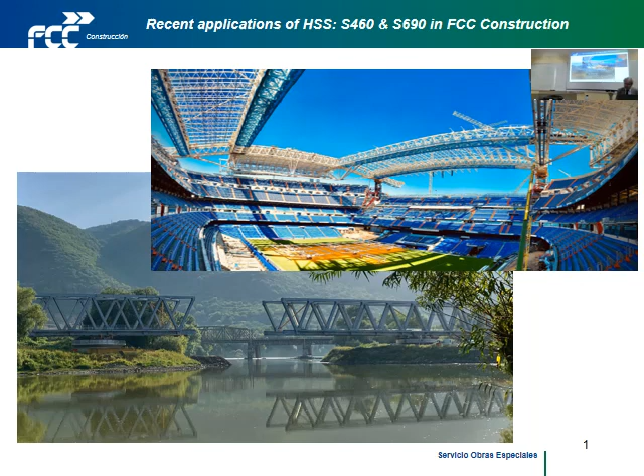Okay. Well, this, as he has mentioned, we're not going to talk about this today, because there's some 420 in Barajas, but not too much. Okay. Systems, floating, lifting. Okay, but that's not what we're going to talk about today. It is about the high-strength steel.

Well, as you can imagine, the word itself has changed over a long time. Now, more or less, we could agree to call high-strength steel something that's bigger than 355. But we also need to be able to... We'll talk mainly about 460, 690, and I'll try to mention something, but that doesn't mean we have used it. We are trying to use it, but not as something that's weldable, 960, okay?

But I think, from our point of view, after designing, we have to do the construction of the system. It's very important to actually have confidence that things are going to work. So we cannot get into some material in which we have any doubt about how it will be working. So besides the high yield of the material, we have to have a better toughness, so we can avoid brittle failure, and we have to have an improved weldability to avoid cold cracking.

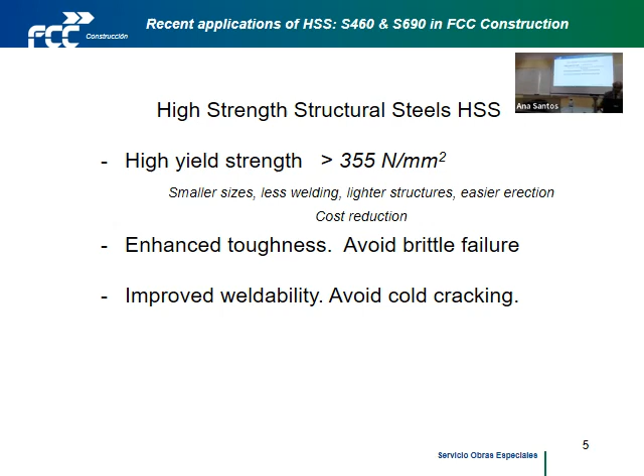That's why I'm going to talk at the end about 960. But never, at least from our point of view, as something weldable, at least up to the moment, weldable with the normal things. Okay. I wanted to tell you, of course, that we can remember that up to more or less, I don't know, I'm not very good with dates.

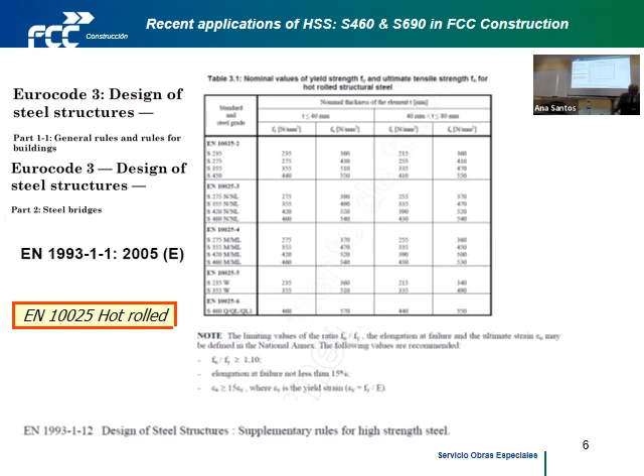More or less in 2005, in the Eurocode, we only got up to 460. And there were some supplementary rules that talk about high-strength steel. Later on, in part 1-12, we got up to 690, well it says 700, but 690. But there was a clear difference in how these steels are produced, which we'll talk about later, and so how we are going to be able to weld and to work with them.

And of course, there was a problem because up to 460, more or less, the old rules of Eurocode were good. Because there was a clear difference between the yield strength and the ultimate strength, so you could use plastic calculations. And now, since you get 690, the Eurocode has to start saying, okay, if you're going to do plastic calculation of the section, you can use up to 690. If you're going to do plastic calculation of the structure itself, then you are only able to use up to 460. And that's, let's go on.

And this is how it would be more or less in 2018. In 2018, already in the normal part, in part 1 of Eurocode, S690 has been included. Instead of being in a special part, it has been included in the normal part. And at some point they said that 960 would be included in part 12. But Kuhlmann, the person most responsible for Eurocode, has said that 960 can wait a little bit to be included in Eurocode.

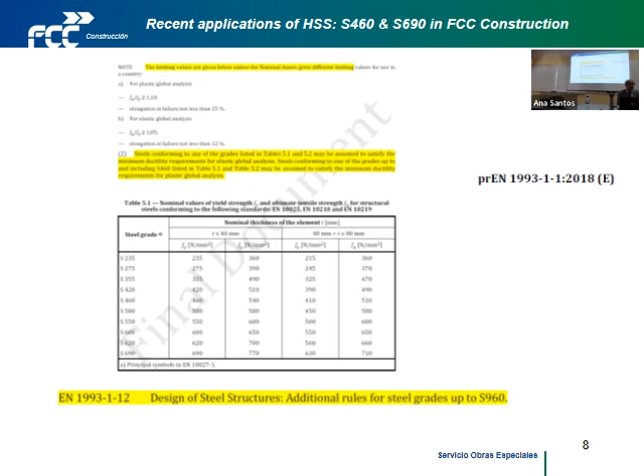We have used up to now 460, 420 at some moment, but I think 420 is dead because it's very near 355. 460, 690: we have used it a lot, and we'll see in the roof of the Bernabeu we have used more than 3,000 tons, but with a lot of care, of course. And for 960, we have proposed to use it, but without welding. We'll go on to this afterwards.

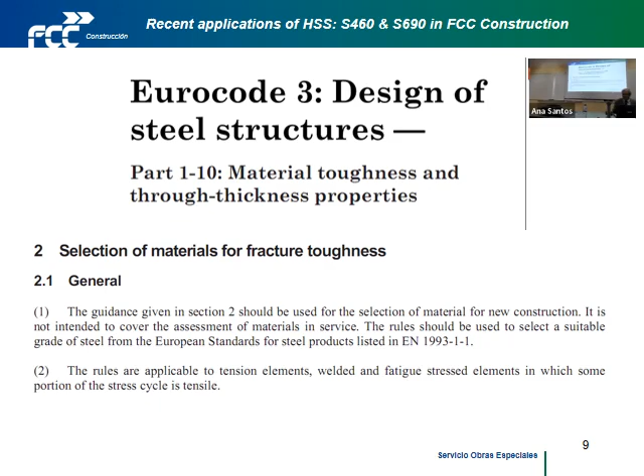Okay, we are not going to talk about fracture toughness. It's very important because in the selection of the material, we could say that the yield strength is only the name, but we have to have the surnames: the quality, at which temperature. But we cannot talk about everything because we don't have time. Of course, we have tables with which we can do this selection, or we can go back to fracture mechanics and look at the details to establish what quality, what subgrade of the material we really need.

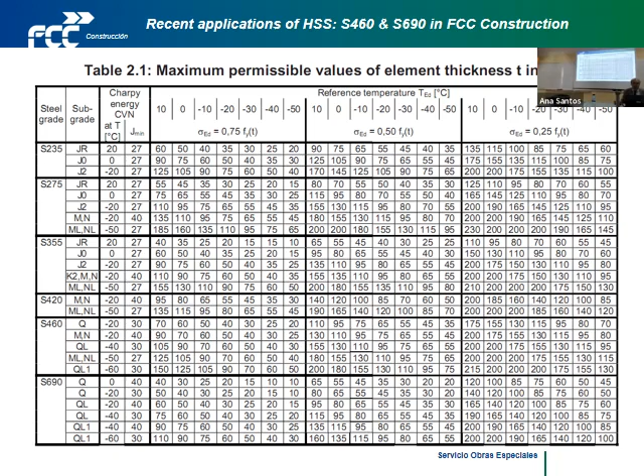All these materials have also changed over time, at least from my point of view. When we were younger, the different qualities of steel were in different standards. These are old standards. And now, to make people understand that all the steels are taken from the same place, the same as in calculations, they have placed all the steels in the famous standard EN 10025. But of course there are very big differences, because the first ones are the ones we have used for a long time. They are non-alloy steels, fine grain. These are the normal ones.

The thermomechanical ones are in part 4. We will see that the 460, we could say, is the thermomechanical one. If we have to be simple, we would say that up to 355, we would be in the first two standards. In part 4, we have the thermomechanical one, the 460. We'll go back to this, but in the thermomechanical steel, we are not gaining the properties simply by alloying, we gain them by a controlled fabrication process with rolling, deformation and temperature, the two things.

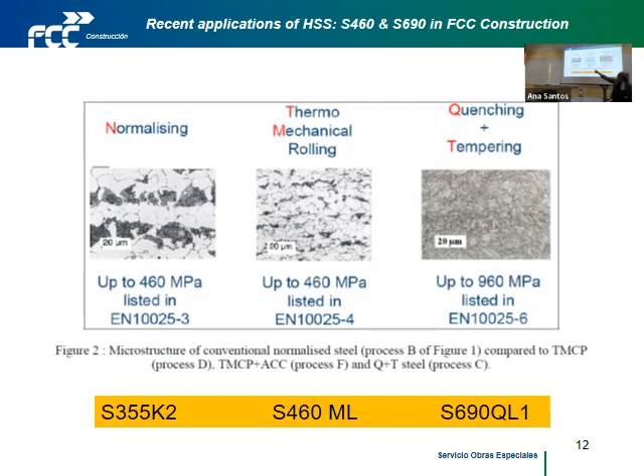In number 3 there are already some 460, but most of the 460 we can buy are already in number 4, in the standard number. Thermomechanical steels are not obtained simply by alloying.

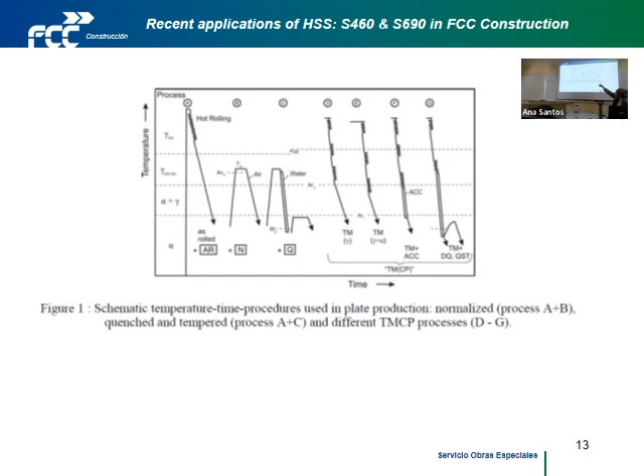As rolled, normalized, you put the temperature up, you let it slow down quickly, or a thermomechanical process, or the quenching, as I mentioned.

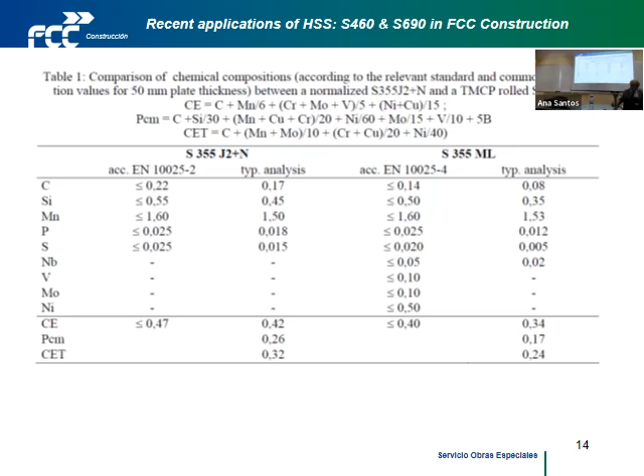Of course, the composition. Why are thermomechanical steels so pushed by people from the companies, from the providers, trying to sell them? Because it's easier to weld, since the properties give us a lower carbon equivalent, so it's easier to weld. We have better properties, of course.

Let's go now and try to mix all this together and talk about weldability. In weldability, at the end what we want is to weld the steels avoiding cracking, to weld the steels not with a special process that can only be done in a laboratory, but with a process that can be done in workshops. They have to be more specialized, but normal workshops, I mean, something we can do every day.

We are going to talk a lot about the heat affected zone. We are going to talk about that quite a lot because it's where we will find a lot of difference between the thermomechanical steels and the quenched and tempered steels, between 460 and 690.

One thing is that in the normal steels, we have used all from before up to now, up to only 355. What we were mainly concerned with was to avoid having, in this heat affected zone, too big an increase of hardness. The hardness of the heat affected zone is a measure of the type of structure we have in there.

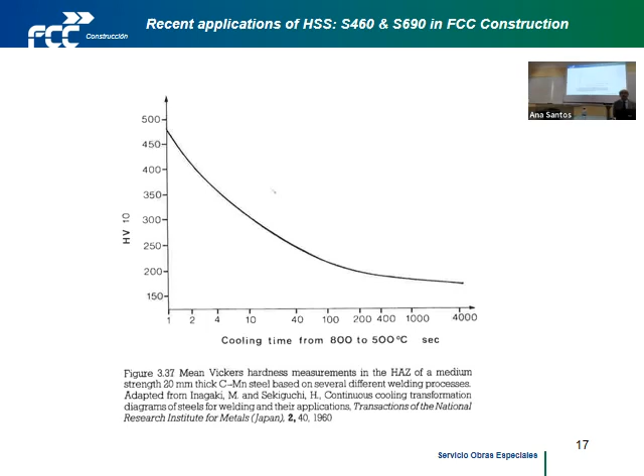As you know, hardness is also clearly a measure of the tensile strength of the material. So we could say that if we have a big hardness, we have a high strength material, but it's brittle. That's what we have always been trying to avoid in normal steel, in 355.

We must always take into account that in a welding process we have the raw material, base material, but mainly the heat affected zone. That's the place where all the different passes of the welding are acting in a cycle. If we do preheating, with a preheating temperature, the temperature will go down more slowly, so we will have a bigger time from 800 to 500.

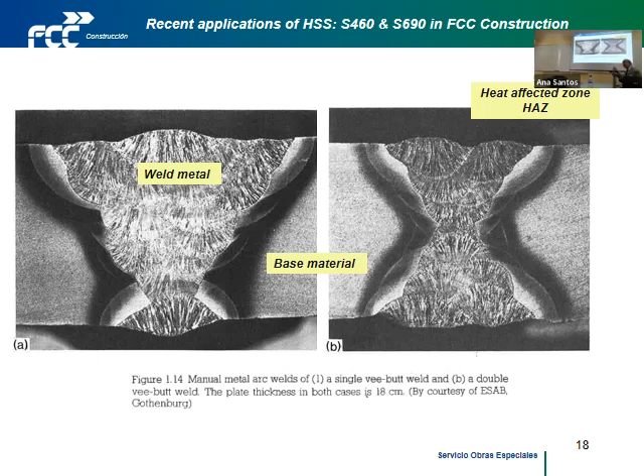Here we can see the hardness in the heat affected zone of a structural steel. This would be a normal steel. We will see later that thermomechanical, but above all the quenched and tempered steel, the 690, are completely different from this. In a normal steel, we have the hardness appropriate to the material we have.

In the weld metal, we can choose the weld metal, of course, but here in the cycle, if we have a very small cycle, meaning the time from 800 to 500 is small, it means the cooling is very quick, we will get a higher hardness.

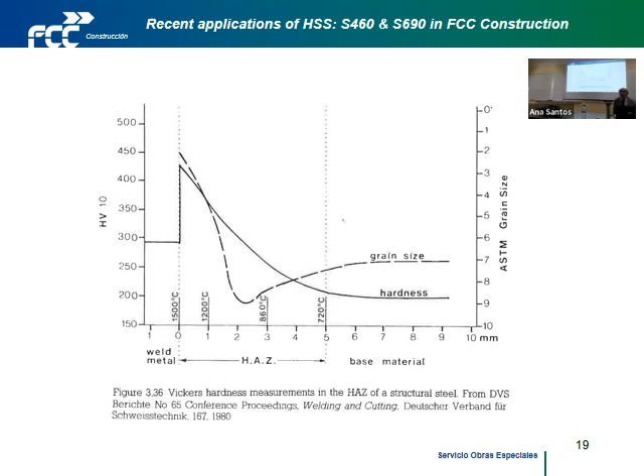This is one of the things we are always trying to avoid in our steels, in our welding procedures. This is part of a qualification process of welding. One of the things we do is what we call hardness traverses: on a line parallel to the plate, 2 millimeters here, another 2 millimeters, one in the middle, with 3 points here, 3 points here, 3 points here, 3 points here.

Here the hardness of the material is very, very high. This is the normal phase because in the weld metals you can control it. In the middle, each layer you apply normalizes the steel that's already there. If you do a radiography or ultrasound or anything, you won't detect that.

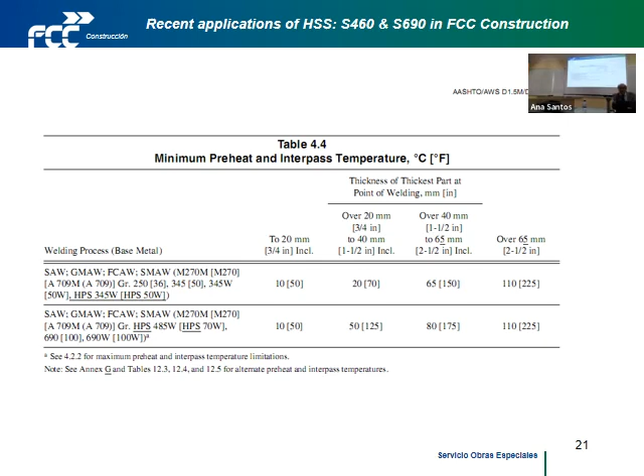I think this is very important for everybody to have clear. If we have a bigger time, we will not get this hard structure, this martensite. We will not get to these high values. That's what some parts, even in this type of standards, give you—talking about hardness control. It's another way of talking about the same thing. We have to avoid this very quick cooling of the weld material. We have to avoid it.

Of course, another word is hydrogen control, because well, I don't know, maybe from a university point of view it's more understood, but we don't really... I think it's not really understood why. But there's a problem with hydrogen, and mixed with this hardness in the material it will give us problems. We try to avoid it.

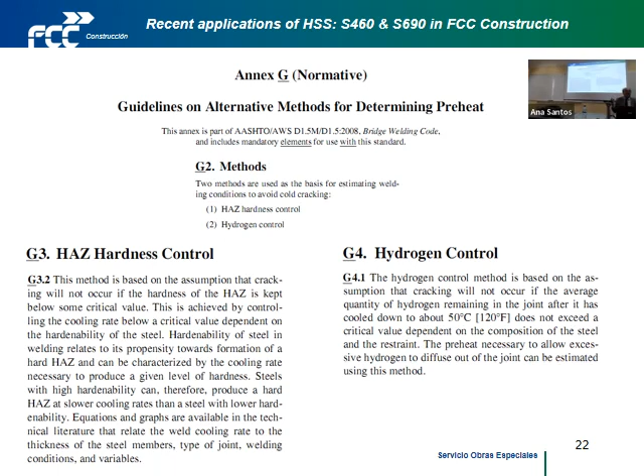How do we avoid the hydrogen? We can talk about anything—all these things have their practical point of view. We have to keep our electrodes dry, not to have water. We have to keep our surfaces clean. If we want to have electrodes dry, we have to put them into ovens. If we have to take care of any of these things, we have to waste money, let's say, have to take more care. Of course, if we have a very easy material, you don't have to take care of anything.

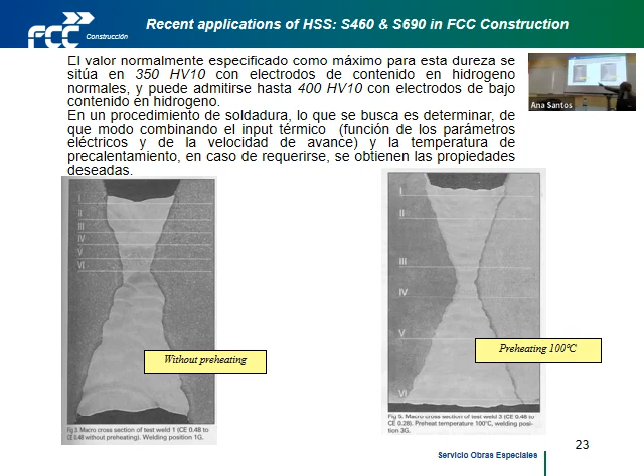Here, for example, it's only to talk about something, but you can see that this is a quite big plate. Anyway, the difference between preheating and without preheating and with heating, I want to show you.

A workshop doesn't want to put preheating. It's a waste of money, a waste of time. People, it's not easy to weld because you cannot touch the plates. But you have to avoid having these high values in the heat affected zone, so we have to put preheating.

The values, the number of values we accept is 350, also 400. When we accept 350 or when we accept 400, it depends on the electrode, the content of hydrogen of the electrode. If it's a very low content, we can get up to 400. If it's higher content, we only can accept 350.

This type of thing is what workshops should do. They should try with one temperature, with another temperature, with one electrode. You may be thinking, what does this have to do with welding?

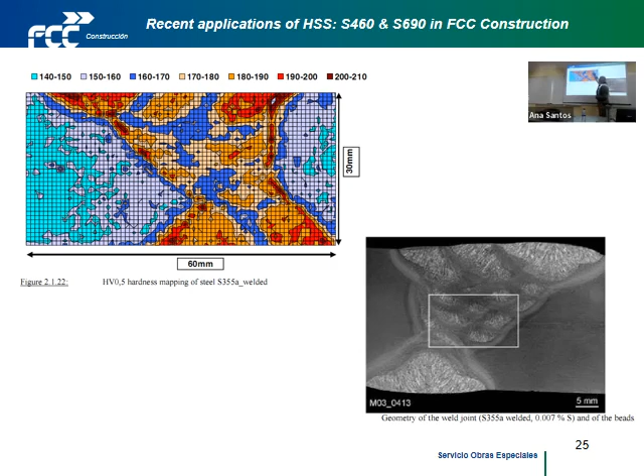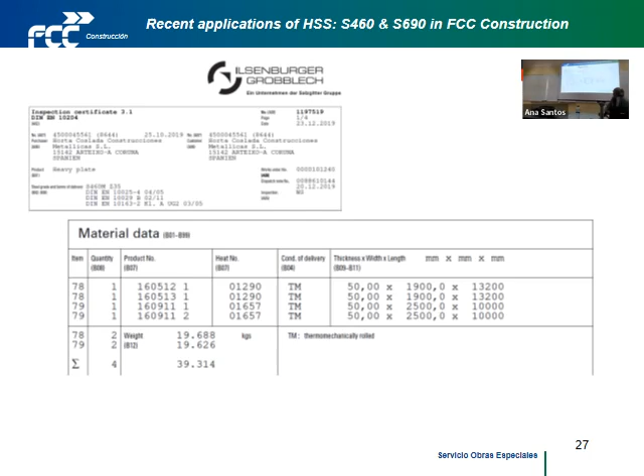We'll get back to this later, but I wanted to show you, for example, 460 — this is a 460. Let's say it's not a big transition. From 355 to 460, we can say that things are smooth.

The change is smooth. We have better properties, toughness is better, not much more difficult to weld, and the problem is more or less the same. We have to avoid in the heat affected zone these very big values.

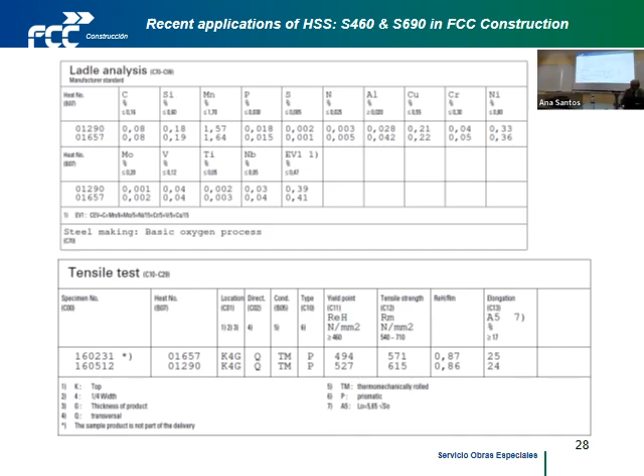Even the fabrication is done by a thermomechanical process. Not to be talking about it too much, but for example, we use 460 in this file.

Of course, for using high strength steel, you have to have the opportunity. You have to look at a situation in which, first of all, you have to be able to use it. You have to avoid things like general buckling. This is a funicular curve, and all the materials under compression, more or less compression.

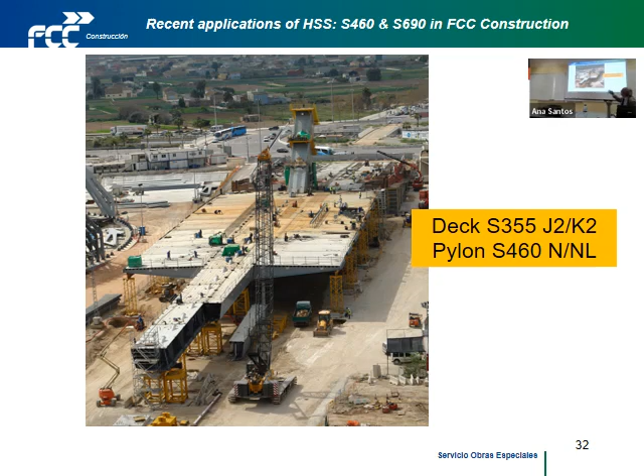We even had in the original design, let's say, a second plate here — we have two plates. So it was very difficult to weld all these connections on site because you had two plates.

Using high strength steel, we were able to put all the material on the outside, have only one, and we have access from the inside and from outside, so it can be well welded with access from the two sides. Also, the erection was made easier.

These are normal things that everybody says about why do you use high strength steel, but you have to find a place where you can use it. You cannot use it anywhere.

We also use the stiffeners at the same place. We only ask for materials of 50, 30, 40 — very small quantities of plates. This is some time ago, this is about...

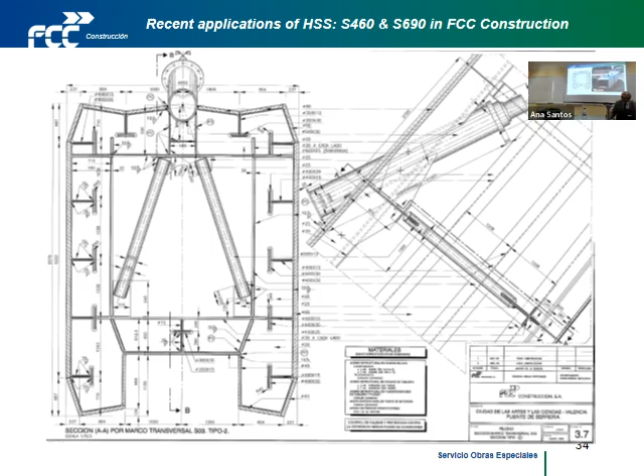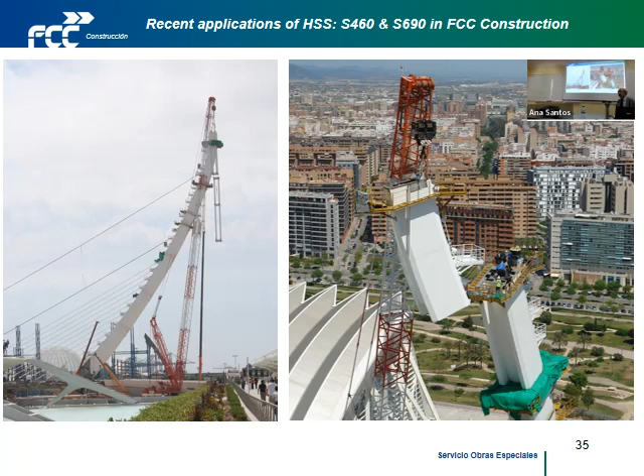These are, as you can see, of course, we can use the crane. We have bolted connections, as you saw before, because the connections were very bolted at the first moment, so the crane can do a lot of work and hasn't got to stop. But then at the outside, we do the welding of all the plates.

The plates are welded, but at the beginning, only bolts are used for the erection connection, so we don't have to wait for the crane to move. Okay. But this is, I think, a good case where you can use high strength steel, 460.

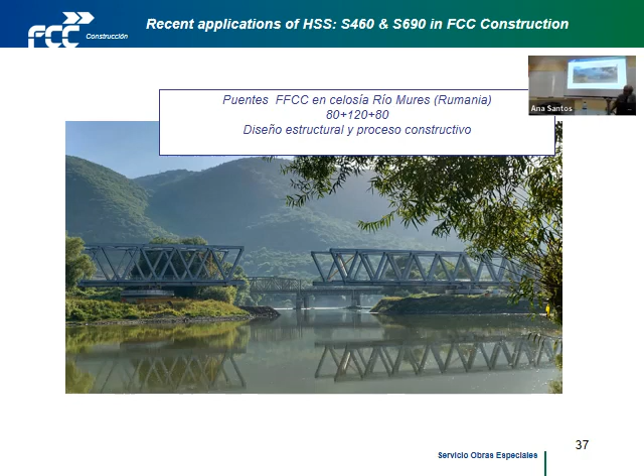Here I have another case. These are several railway bridges in Romania. It's a new European line, a double track European line. I think it's corridor number 7 or something like that. It's paid by the European Community, and we have parts in 460. These are about 80, 120, 80 meters. There are 7 bridges like this, all in the same line. Okay, it's very good for the workshop.

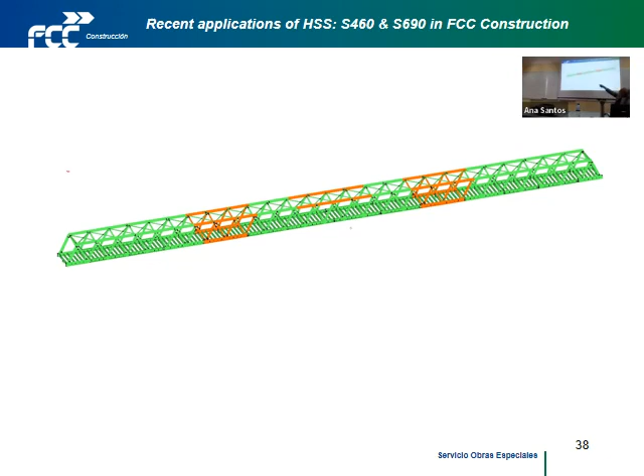And 460 is the part that you see in red. Of course, what are the parts we use in a bridge in 460? The parts that don't affect deflections. Another good place to use high strength steel is in a system in which the deflections are not a problem. Of course, trusses are then a good place to use them. Even on top of the supports, the famous hogging moment, there you can use 460 without affecting too much the deflections. At the end, we use it a little bit in the middle, but mainly where we'll talk about.

One of the problems is that you have to take a lot of care if you use 460 in bridges. Another typical problem is fatigue. Okay. Well, we didn't have a fatigue problem in the pilot, of course. Here we have, and we will talk about it, ways to improve the fatigue resistance. Because as you know, when you have welds, and welding is the main process of fabrication, the fatigue detail is controlled by the fact that it's welded. So you don't improve too much.

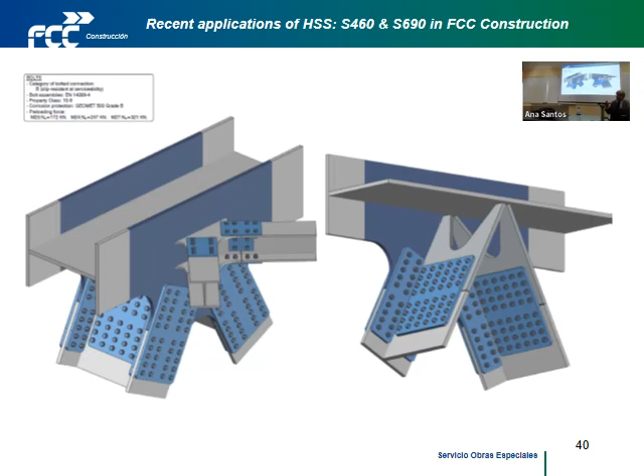We use the one called high frequency peening. We have used HiFIT for all these welds to improve their fatigue response. Now we are talking about the fatigue response of something that is welded. At some point, I hope we will get to improving the fatigue response of something that is bolted. Because once we have high strength steel, we have to understand that in all aspects, bolted, welded, buckling, or anything, we are moving a little bit to the edge of what we at this moment understand, and we have to take more care about all these things. These things are present in other steels, but in other steels it's not so important.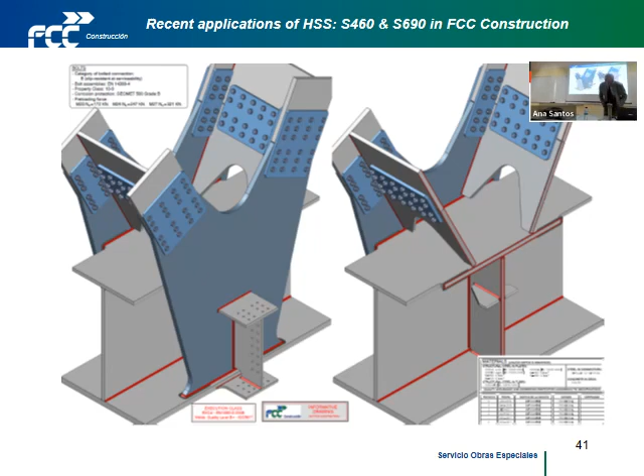Okay. Well, this is a photograph. Anyway, you are seeing that something has happened there to the welds. Okay.

Here you're starting to see the shot peening, where the HiFIT we have done all around these details, only in the parts that are really needed, because we are a precision company. We have to know where it's really needed. Okay, it hasn't been easy.

This is in Romania. To use 460 in Romania, I don't know if you have worked there, but the contracts, the drawings are signed by 15 persons. It's very, very difficult to make people change. Okay, yeah, but you always find something. We were in contact with some people in the University of Timisoara, and well, I think they understood.

They saw that we really tried to care for the details, because at the end, you know, steel structures are the details, and even more when we are using a very high strength steel, you have to take a lot more care in the details. All these bridges are completely welded, of course. Welding was done here in Spain, but then they were taken there.

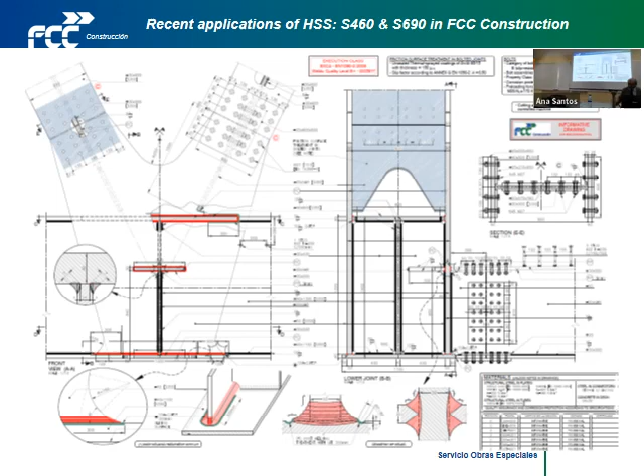A little bit more of this subject. Well, here there were only some photographs to make things advance a little bit.

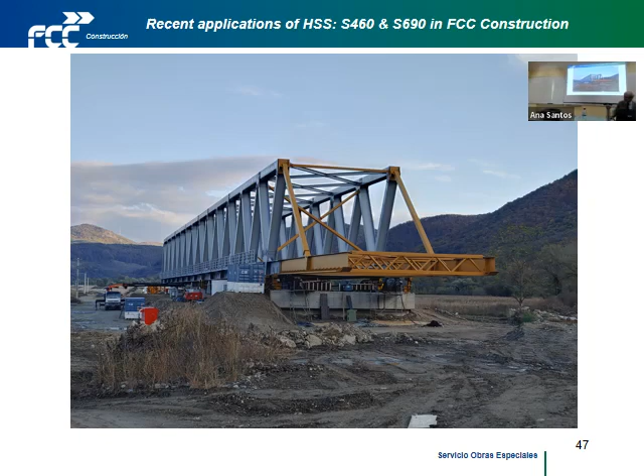And it's a good place in which you can do tests, we could say, but a little bit more than tests. You can use it on site in a real situation. Okay, guiding. This is not the object of this meeting. In the middle, that's always a good thing.

Well, here I come back to the subject of the HiFIT, so you don't forget it. As you know, it's a compression system. And we are using this system because it's quite easy to apply. I think we haven't used this one. It's the commercial one. It's a very simple thing.

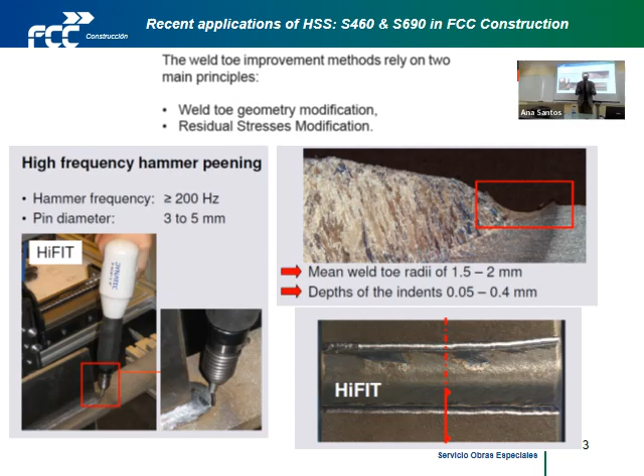And even not doing it very well, even if someone that uses it is new, you get good results. That's important also because you cannot be confident that it's going to be done perfectly. Things are never done perfectly.

This has been tested quite a lot in European programs, because there's a program in Europe called something like Refresh, from refreshing structures, because there are a lot of trusses that have reached their life. Remember many trusses made at the beginning of the 20th century have more than 100 years.

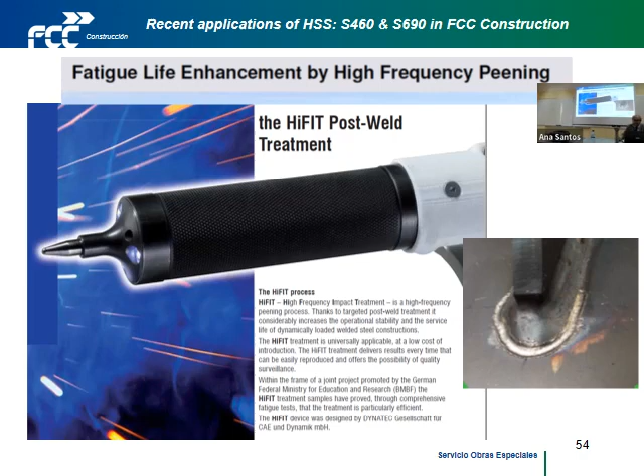These are bridges, that's why they call it Refresh, and they are looking for systems to give them more life. They are mainly railway bridges, trusses used all over Europe, in Germany. I'm not going to talk about that, but that's why they have stimulated all these systems to get better results in a new structure. These are results. You get much better results with this type of system.

One thing to mention about this is that these fatigue improvements depend on the yield strength. You get better improvement with a better steel. We will see this many times, but often there's not enough confidence, or it's not written in the standards. But many of the things we're going to talk about improve with the yield strength of the material.

Of course, as everybody can understand, standards have to be cautious. I don't know which word to use, but they have to be careful. But it's clear that that's where we have to go. We have to go on doing a lot of tests in universities. There have to be more tests of all these things.

But it's clear that in high strength steels, we have to. It's a more expensive material, of course, and you have to be able to use it. Just before we were talking about, besides using a high strength steel, you have to use calculation methods, systems of calculation, more detailed, to take advantage of the high-strength steel. You cannot simply use high-strength steel and then not do anything else. That's why you have to mix it with other things. We always try to mix it with other things.

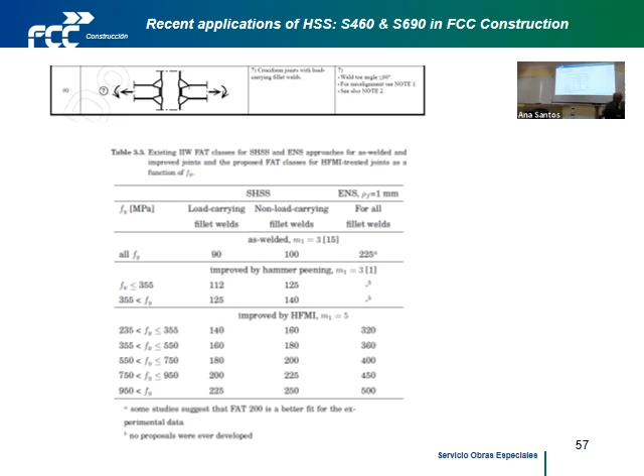So that's what I mean: when we get to high strength steel, many of the things we have always said were like this and that are a little bit not exactly that way. Okay, and we have to try to take advantage of all these situations. Okay.

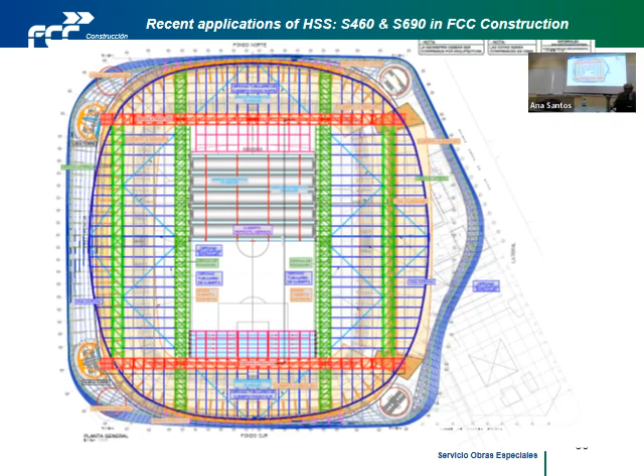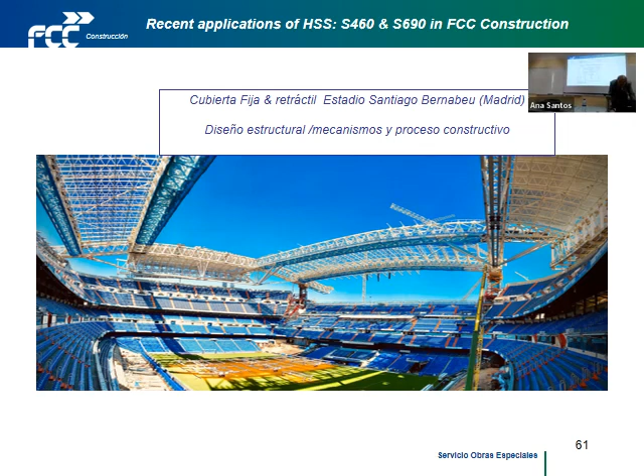Well, this is the new stadium we are working on. I think it's better in this one here. This is the one we want to talk about. This is one of the big transfers with the tension element here. And here I'm going to show you which parts are made of each steel. What you see in this color is 690. And 460 is all around.

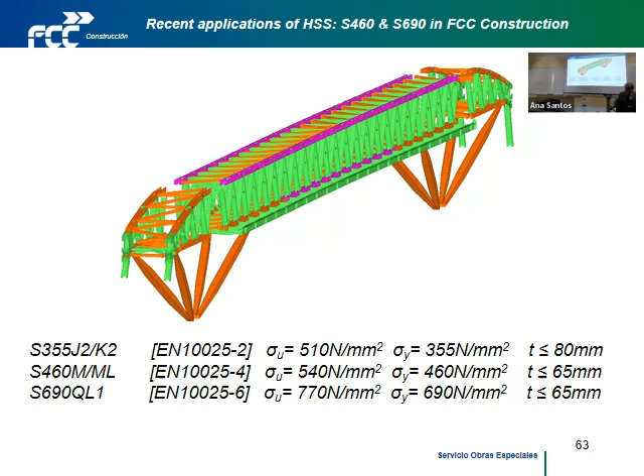Here, the only ones that are green are because in this element, nearly all is 460 and 690. Here are the other ones, the ones in the cross direction. In these ones, we still have some 460, but we don't really have 690. At the end, you have to use it where it's worth it, because you also have buckling, local buckling. You have to have a relation here, with the plates, for example.

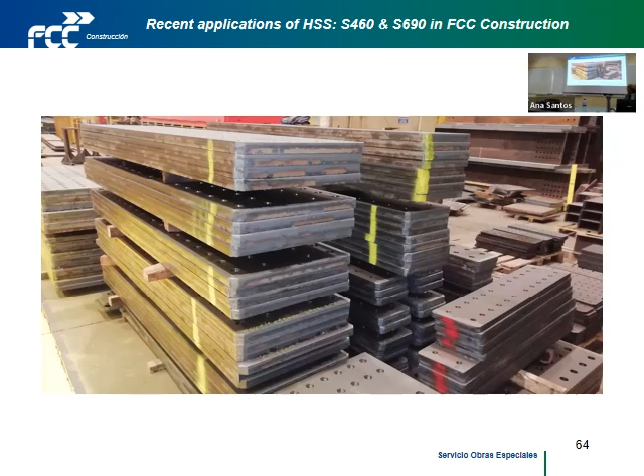Well, these are the plates. They were very big plates. One of the things we usually do when we use 460 or 690, as I have told you before and will tell you later, is that anything in the world you have to pay for. If you are using good material, you have to pay by taking more care. One of the things we usually do with 460 and 690 is ask for them with approved yield strength. You can ask for that. It's a small cost, not too much.

For example, here the plates were up to 65 millimeters, and we have the full 690 yield. You don't have, as in Eurocode or other standards, a reduction with the thickness of the plate. Because sometimes when you make the plate a little bit thicker, the strength gets lower, then with buckling it has gone up. You get into a circle.

It's a good thing to ask for, and now it can be done. You're not going to do it for a normal building, but for something you really consider important where you're using high strength steel, you can ask to have approved yield strength, the properties independent of thickness up to some limit. Okay.

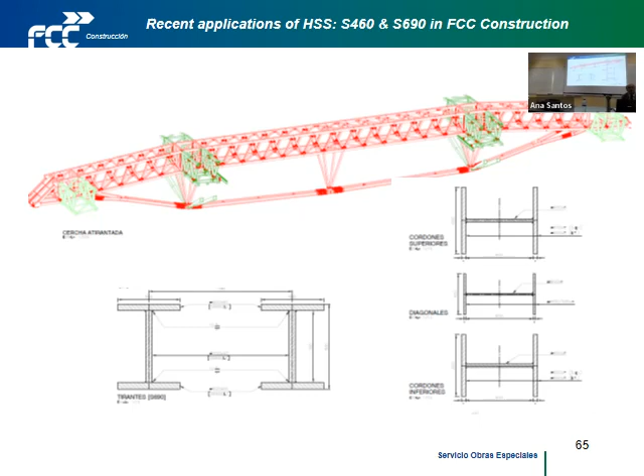But here you can see the main ones here are 65 millimeters. All the connections will be welded and will be bolted on site. That's another thing. Of course, we have not welded on site. Nothing. No 690 has been welded on site, not a single plate.

We are saying it can be welded. We're going back to what we talked about before. But even if it can be done, it's clearly more cautious to do it always in the workshop. When you're using high strength steel, at least from 690 upwards, you usually only weld it in the workshop.

And I can tell you, here in Spain we have no more than two workshops that can weld 690. And even in those workshops, the persons that weld it are two or three, they are very special, or the machines. The machines for welding.

Before getting into this subject of 690, for example in the stadium, or the place we'll talk about later, we asked for material from the company, Dillinger. In this case, all the 690 was from Dillinger. We asked for this material, we did it with 50 millimeters, and we did a lot of tests.

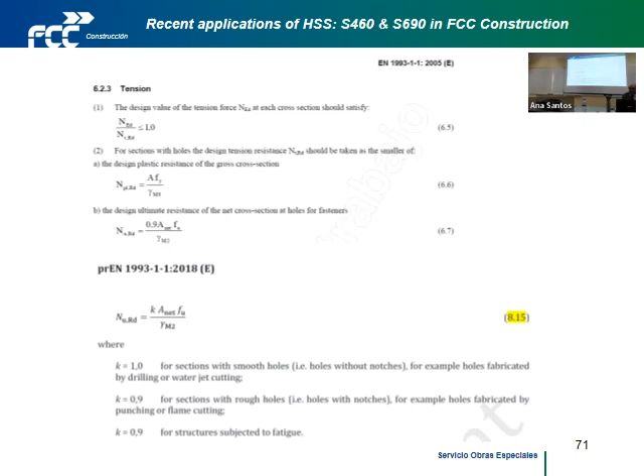In Eurocode, up to some moment, we had the 0.9 factor when we have holes. Now it's allowed not to take into account the 0.9 when you drill the holes; you avoid possible notches, which is where you would have the problem. So we can take that coefficient out. Again, you have to take the 1.1 I told you at the beginning. You have to try to avoid the 0.9. You have to try to take full advantage of the steel you have in your hands.

Now I'm going to talk a little bit about buckling. In buckling, as I'm telling you, the main parts of the structure are shapes with 65 millimeter flanges in 460, 690. All the edges of those plates have been flame cut. If you do the project, you have to do the drawings and the specification. You cannot separate one thing from the other.

We also do the specification, and we ask for holes that are drilled, as I said before, and some other things. And we ask that all the plates from which we are getting those elements for the chords have been flame cut. What are we looking for with this? As you may remember, it's clear that the selection of the buckling curves in Eurocode is due to the residual stresses. It's not said anywhere, but it's clear.

It's due to the distribution of the residual stresses in the cross section. And of course, the table, let's say, is limited because they cannot put a huge table explaining all the cases. But in this subject of the H sections, there's a huge difference between having the plates flame cut or not.

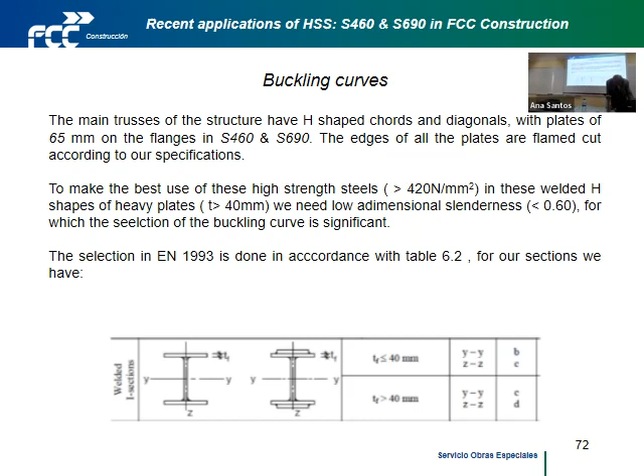For example, let me try to come back. I want you to understand this. It's very important. In a rolled plate, at the edges, we have compression. Okay. In a flame cut plate, if you do a welding, here you have the tension. Let's say, because up to now, everybody said that this tension was the yield. Okay, more or less. Let's say it's that way for the moment. And then here is the compression.

If you have a flame cut plate, you have tension on the edges. So this plate and this plate, as you can see, are completely different. In Eurocode now, there's no difference for the buckling of an H section about the weak axis. There's no difference. They don't talk about flame cut, no flame cut, or rolled, or nothing. If they don't talk about anything, they are considering the worst.

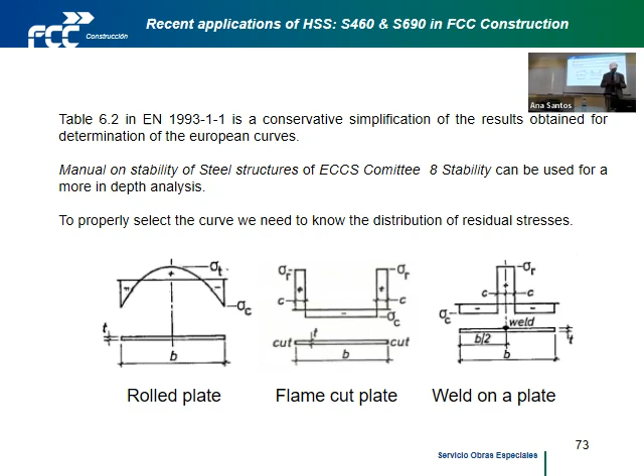What I mean is that for the buckling of all those sections we have seen, we have used in the bridge also, because it's also an H section, or in the trusses of the stadium, also the same section, they're always using one curve. And as you know, when you have small slenderness, the difference in the curves is very big. So when you have small slenderness, that's where we are working here. You have to avoid having buckling. So it's very important, the selection of the curve.

Here I have written that the buckling about what the code normally calls the small axis is critical. And there's a very big difference. We are saying that the difference is 8% or 12%. Another 10%. We have talked about several 10%. If you have a reduction with thickness of the yield strength, you have more than 10%. If you have to consider the high consequences of failure, you have to consider 1.1. So you have 1.1, 1.1, 1.1, you get to 1.30. Okay, you are not using the material.

So what we ask for is, well, here you have another drawing. This figure is very old, but it has been taken away from the Eurocode. This figure gives you the distribution of residual stresses in welded shapes in which the plates are rolled or flame cut. Okay. Compression, and here tension. The buckling is around this subject. That's why the worst thing is to have residual stress compression in the place where I have the buckling. That's obvious.

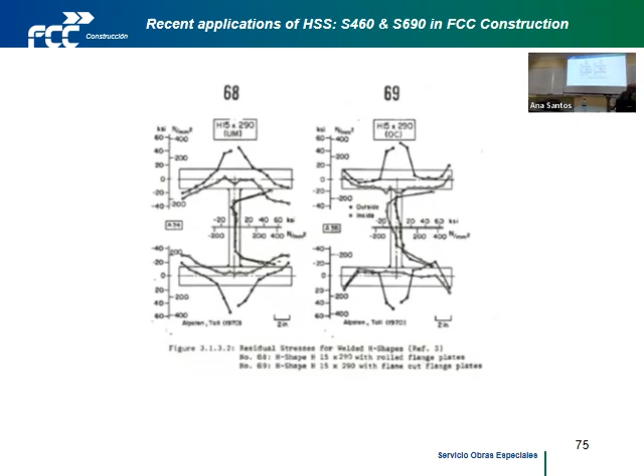Well, this was done in old Eurocodes. This is something from a very old Eurocode. It was an old thing that was taken away, and now that has been good for us, because when we have to tell the engineers of the client we want to use a better curve, why do I want to use this better curve? Well, this is nothing new. This was proved a lot of years ago. The question is that it has been taken away, to make things more simple, more easy, no?

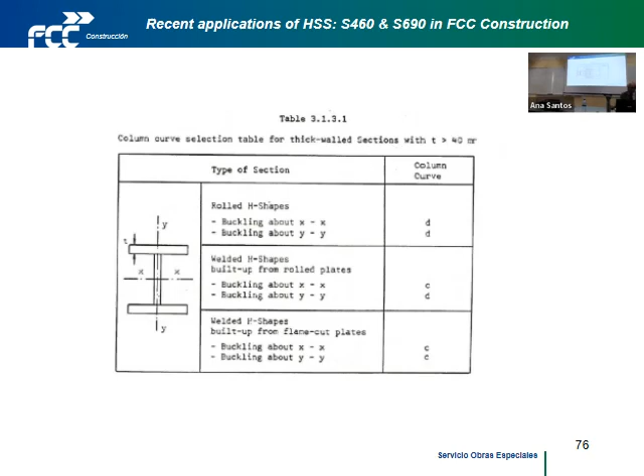Because I think we were talking about this a moment ago, that everybody has to use the Eurocode, and you have to be careful, because if you're going to use things, you have to understand a little bit more. One of the things, well, there's a.

Up to now, up to recently, everybody said that the distribution of residual stresses was independent of the yield point. As you know, when you model by finite elements, you have a distribution of residual stresses expressed as a fraction of the yield point. That way you are saying they are related to the yield point. But it's not exactly that way, studies are showing. The distribution of residual stresses in a high strength steel shows fewer residual stresses.

So we are getting to the point, of course all these things have to be more refined, whatever you want to call it. But this is going to improve the curve we have. Not only what I told you before about cutting edges and the distribution, but even taking into account the yield strength of the material, we have an improvement in the buckling stress.

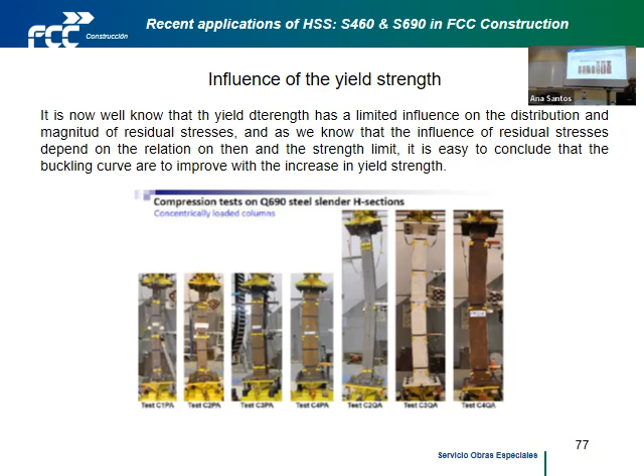Well, this is, here you can see it. According to Euro code actually here, and it is completely over the best curve. They are completely over the best curve.

Well, we haven't used this, because you cannot use everything you see, things have to be more refined. We haven't used this, but I think there are even studies where you already have analytical formulation in which you modify the factors related to the curve according to the yield point, and you get a better adjustment. There are a lot of articles about these things that have been made. There are some standards. Euro code has started to do that.

If you remember, in many parts of Euro code you now have a column with 460. In the famous table, instead of just the usual selections, you have a table with 460, but they haven't gone to 690 or 960. They haven't tried that yet, though I think they may get there eventually, but they haven't gone there. They have, okay, up to 460.

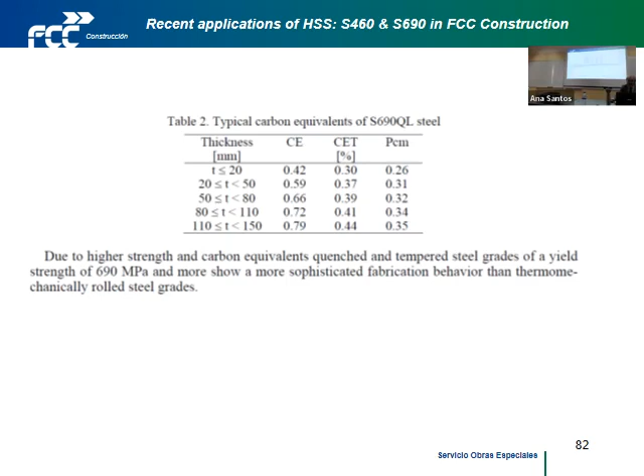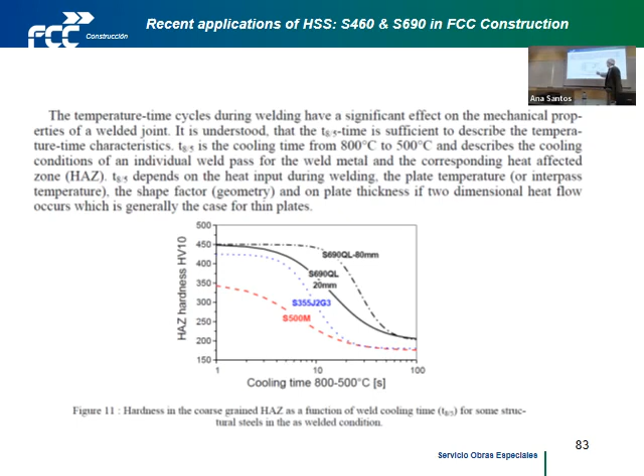Well, I'll try to go as quickly as possible. I'll have to go back to where we started, about this time between 500 degrees and 800 degrees, and 500 degrees. As you can see, I'll try, let's see, that's how it's normally for the t8/5 time in the upper values.

What we have to start making clear is that with very high strength steel, now we are going to start talking mainly about 690, and possibly the use, which we haven't used yet, and even less as welded, of 960. Up to now, in everything we've discussed about welding, we have tried to avoid very high hardness in the heat affected zone. So we have to control the heating to have at least some minimum size of the welds, heating temperature, and everything is to try to have a very quick path to avoid the temperature range that gives us the structure we don't want. So we have a limit from the lower part. Now, with high strength steel, we find we have another limit from the upper part. So when we have high strength steel, we have an upper limit and a lower limit, and as we go higher and higher, they get closer together. So it's more complicated to do the welding.

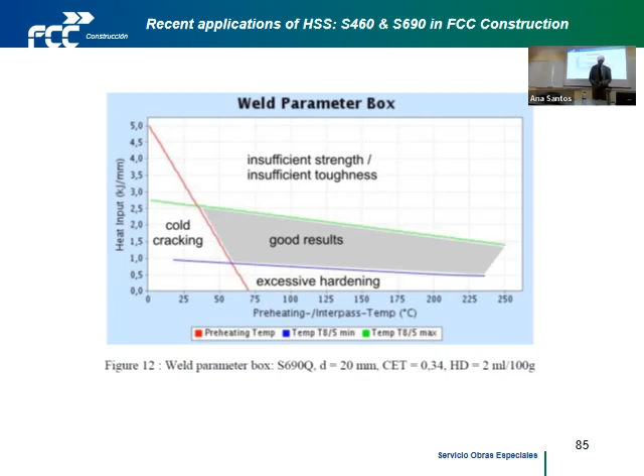This is the Finnish comments from Finland, the comments to Eurocode 1993-1-12. I don't really understand it, because as you know, people from Norway, Sweden, and all that have always been the ones that have proposed and pushed the use of high strength steel.

But now they write something like this. The important thing is that there's a reduction in the strength in the heat affected zone. There is a reduction in the strength of the heat affected zone in high strength steel, what we are talking now about 690, okay? 690, 960. We have said that 460 was more or less with the other steels, okay?

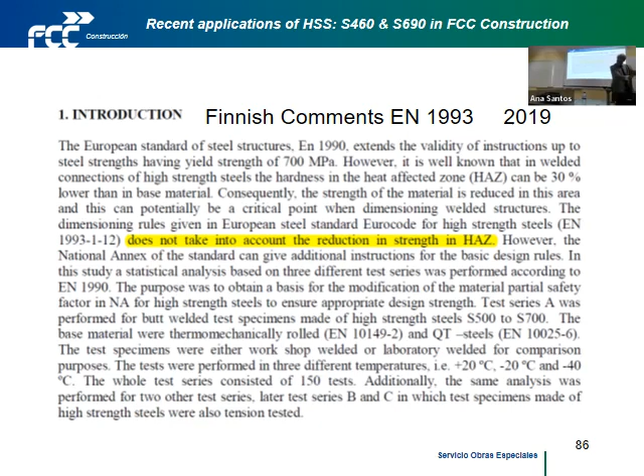What they are trying to say, and that's the main concern, is that in the heat affected zone, instead of having these things that we saw before, that the hardness went up and we went to 400 and 360, we go down. We go down. So we lose strength in the heat affected zone.

But the Finnish people, if you see here, this amount of heat input leads to, 85 seconds. 85 seconds. I don't know if you remember, I don't know where I had it. Well, I hope I will get to that.

Remember that we were talking about 10 seconds or 20 seconds. What they have done to get those results is that they have done the welding very slow, so the temperature has slowed a lot. They have not gotten a functional temperature still. That's why they have gotten those results.

Of course, there has to be, as I told you, a concern about this limit. But if you do the things well, that's not the problem.

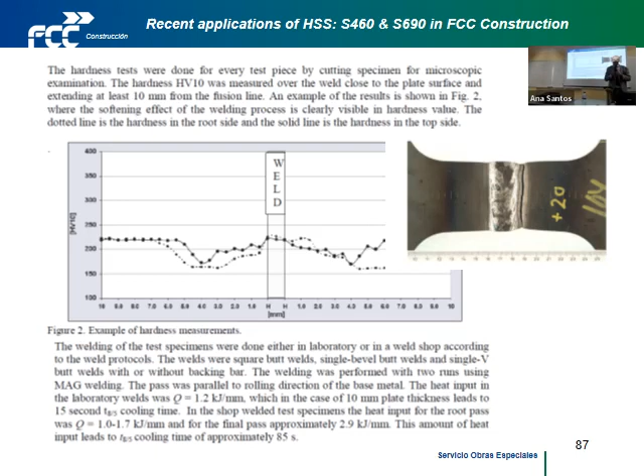It's a little bit simplified, but as soon as you see this and this, you have to be able to see the blue one. Here you have to be able to see that in the heat affected zone is where you can have less resistance, less hardness.

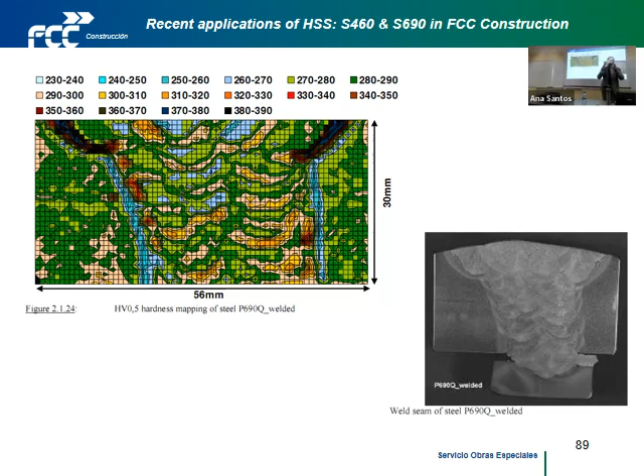It's completely the other way. What we saw for 355, and more or less for 460, is completely different for 690, and we talk about 960. But from my point of view, we haven't welded to 960. So what I tell you about welding is for 690, it's this one.

With 960, you can find a lot of literature or articles on the internet about the problems they have. The 960 they use for cranes, and they still have problems. They still have problems, they find a lot of problems.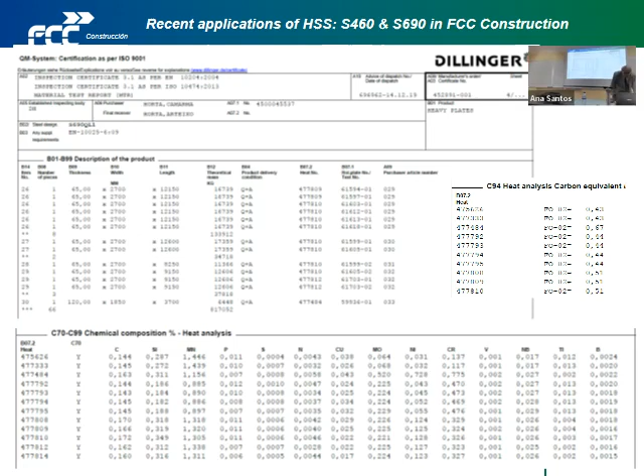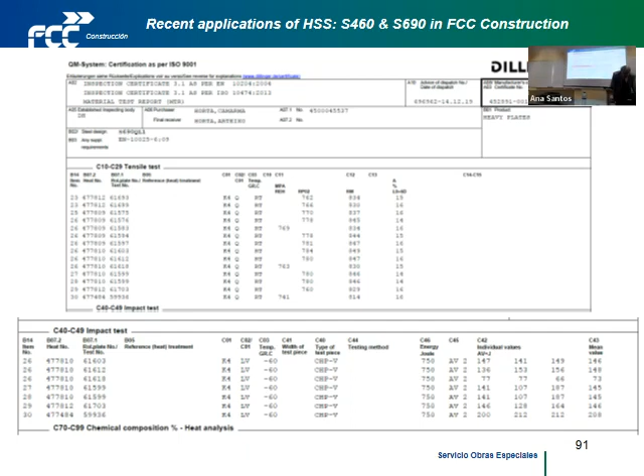This is the certificates from Dillinger, which you can see that we easily get 65 plates, all the tension I mentioned to you. And this is what I'm trying to show you now here.

The loss of strength in the heat affected zone also depends on the size of the heat affected zone. If you have a very small part that has lost its resistance, you won't notice it in the general resistance. It's a little surprising, but it works like that.

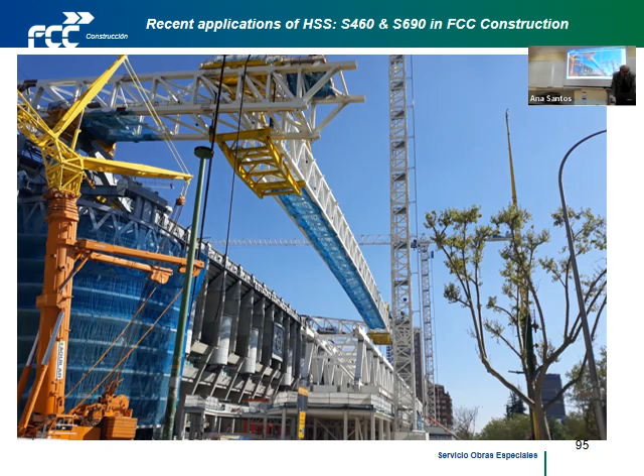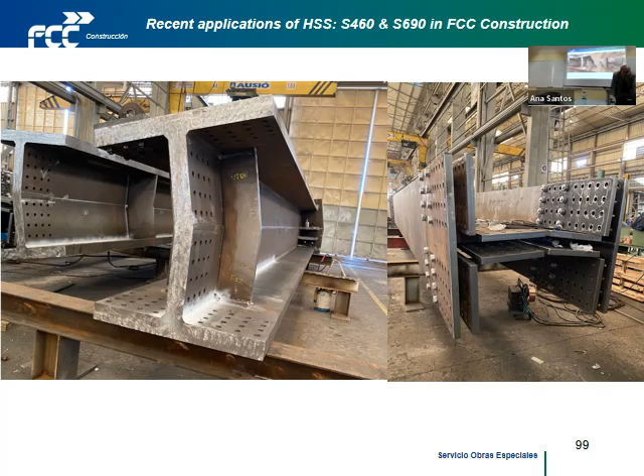I'll go quickly. These are 120 millimeter plates in 460. These are plates in 460 also. As you can see here, some details, 460.

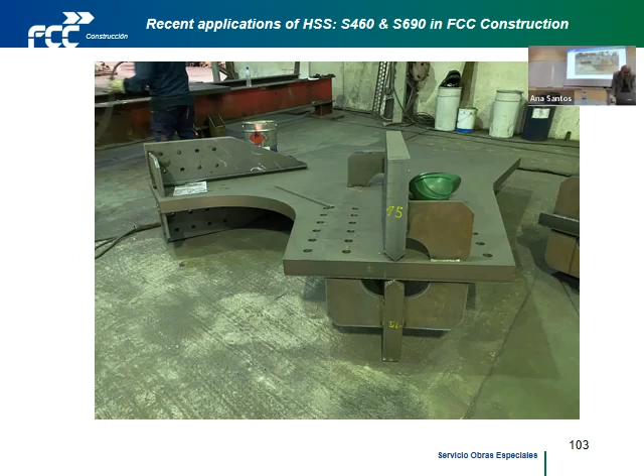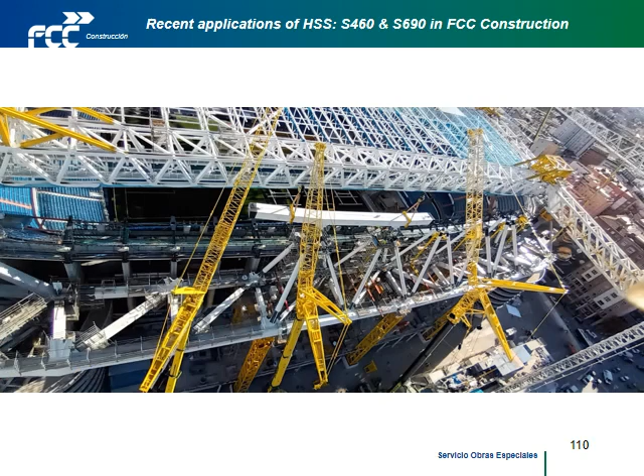Some plates are in 690 for connections. This is a full penetration weld on site. This is a full penetration weld on site. Before direction on... well, this is only an example from an article where you can still find cracking in

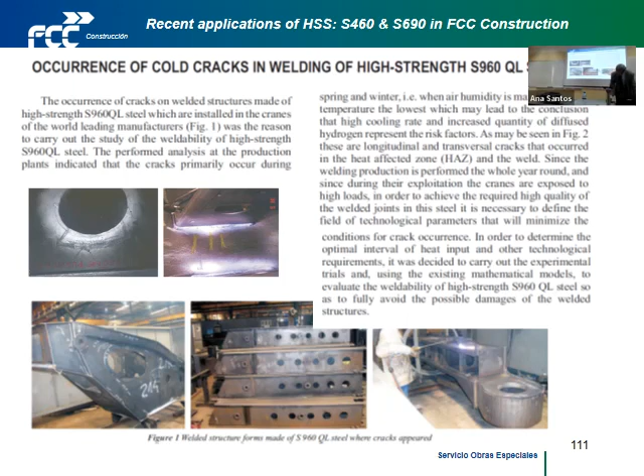I won't be able to talk about another aspect that's very important, how welded connections in high strength steel work. Fortunately, I think there are starting to be some studies about this. I told you some Chinese researchers I don't know have a lot of time to do a lot of tests, and they have done so.

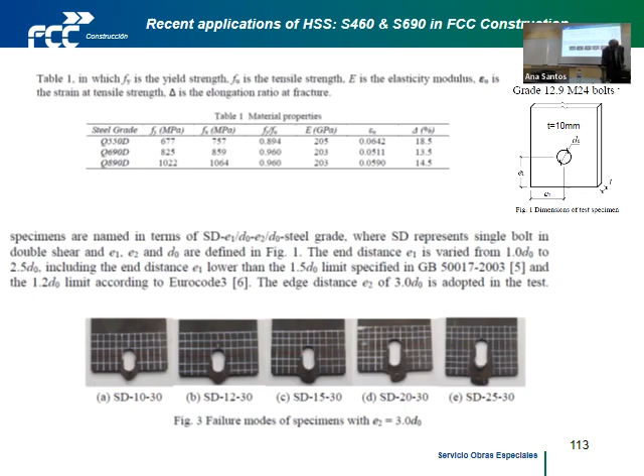But at the beginning you don't have the confidence. You have to check: do bolted connections in 690 have enough ductility to be more or less similar and allow the calculations we are using in Eurocode up to now? The answer is yes, I think. There will be more studies about the subject, but this also has to be proved, let's say, okay?

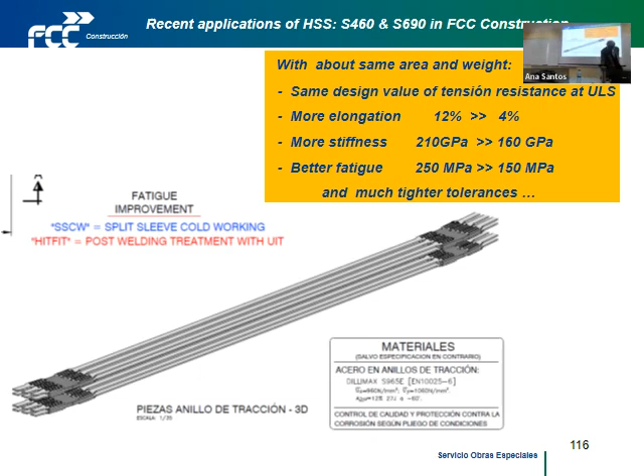This is a proposal we are doing in another study, to replace some cables with 960, these elements of 960. I don't know if you've seen that many cranes, they have changed the cables here for high-strength cables. They have replaced them with plates, and these plates are mainly 960 now.

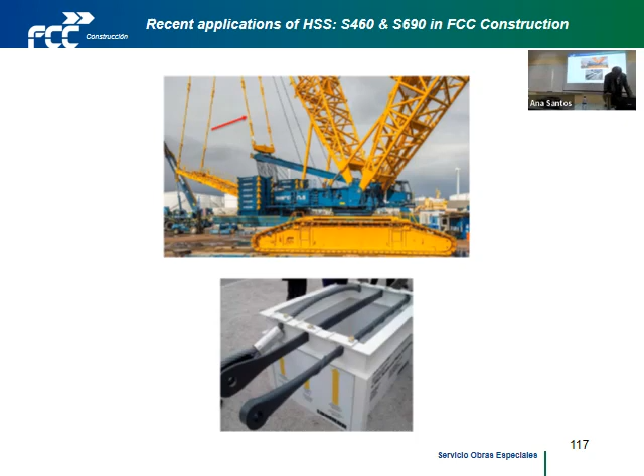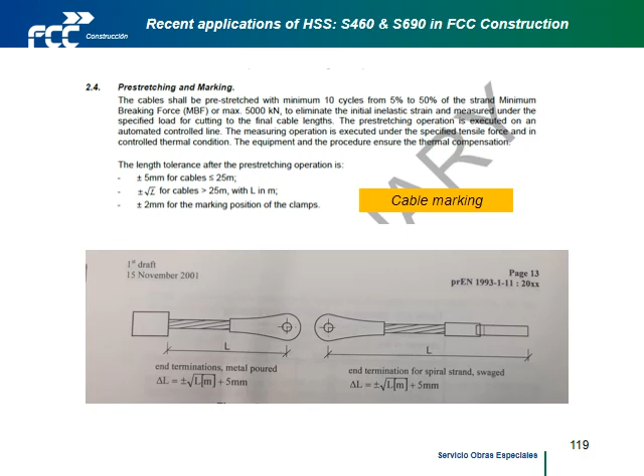The time is short, but I wanted to tell you this: as I mentioned before, if we have something in 960 and we need to improve the fatigue, we also have systems to improve fatigue in the welds, and we have systems to improve fatigue in the holes. So there are solutions, for example.

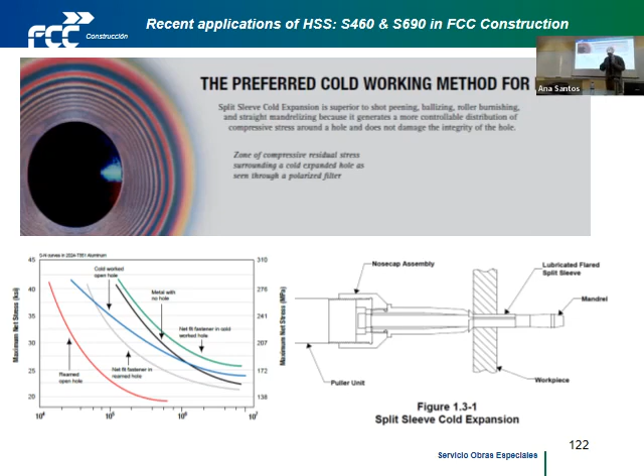We only improve the fatigue in these small holes, we put them here, it's only to save money, okay? But at the beginning it costs money. This is the system that people from the airplane industry have been using for a long time. You know, with a lot of rivets, for the critical ones they use this type of system. I can't explain it further, okay, that's it.